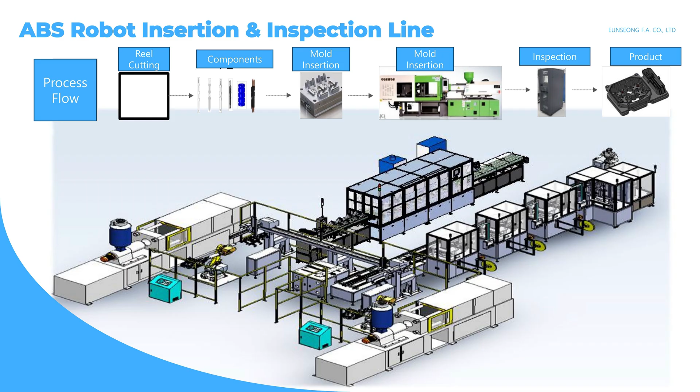ABS robot insertion and inspection line. This integrated line handles reel cutting, component preparation, mold insertion and molding, and inspection to produce finished products. Examining the line architecture, you'll see insertion and inspection stations featuring robotic arms and robotic grippers.

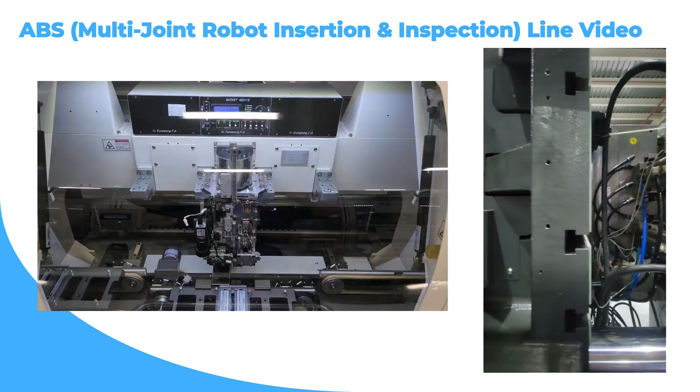EunSeong F.A.'s ABS robot insertion and inspection line represents proven reliability, innovation, and technical expertise.

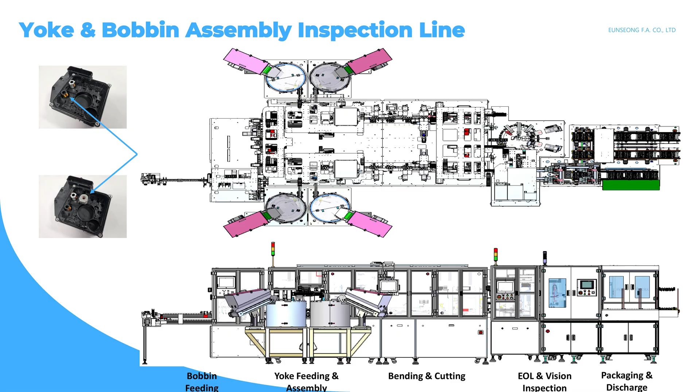Yoke bobbin assembly and inspection line. EunSeong F.A.'s yoke assembly and inspection line processes bobbin and yoke feeding, followed by assembly, bending, cutting, inspection, discharge, and packaging operations.

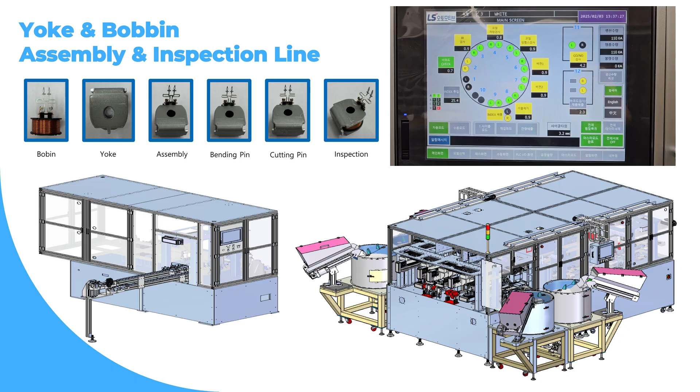The upper left image shows bobbins and yokes before processing, while the right displays finished products after assembly, bending, cutting, and inspection. FPCB crimping line.

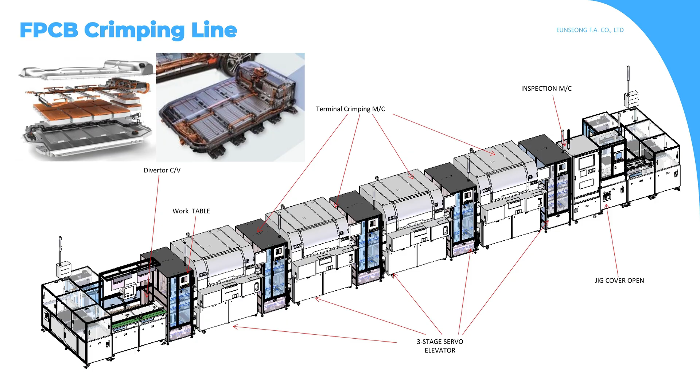The FPCB crimping line positions FPCBs on jigs, performs crimping operations, then conducts inspection and discharge. Dedicated pallets are required, and the system features automatic pallet movement throughout the line.

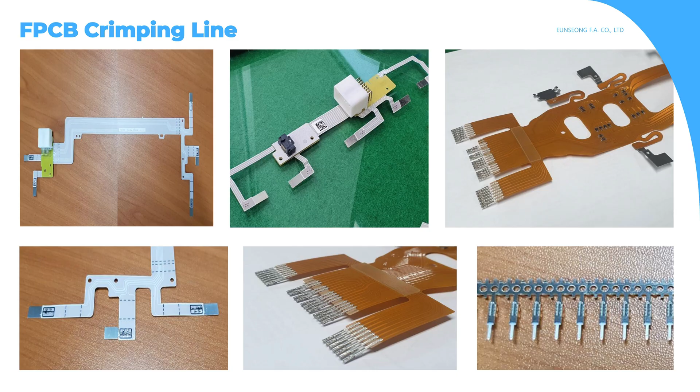FPC stands for Flexible Printed Circuit, a thin, easily deformed alternative to conventional rigid PCBs. This flexibility necessitates specialized terminals, jigs, and accessories.

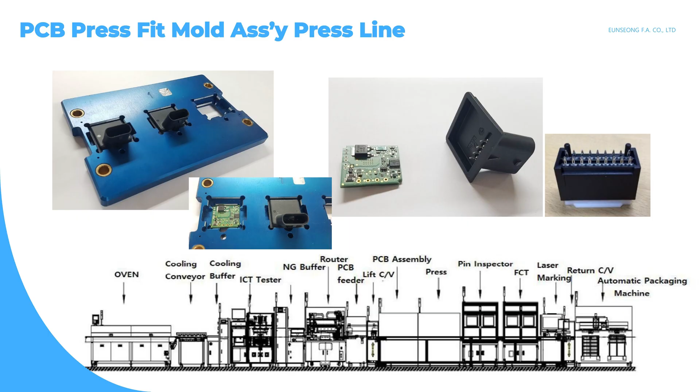PCB mold assembly line. Our PCB mold assembly line encompasses PCB preheating, curing, cooling, circuit testing, NG sorting, PCB cutting, mold pressing, pin inspection, functional testing, laser marking, and packaging capabilities.

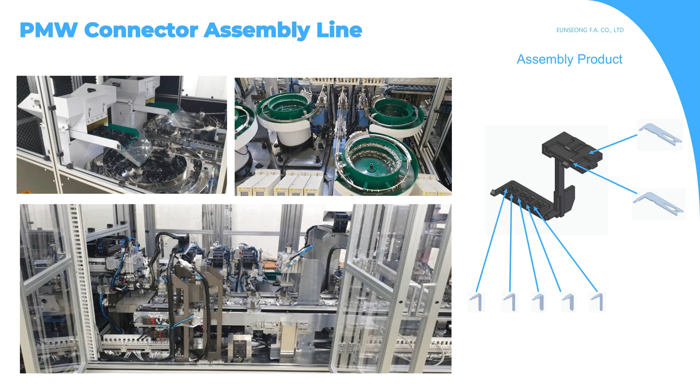The upper left image shows bowl feeders, component supply devices installed inside the equipment, while the lower image displays the actual production line. Mega fuse insertion line.

The mega fuse insertion line is engineered to support mega fuse inspection and assembly, bus bar assembly and barcode printing, bus bar clinching and inspection, force monitoring, and MES history management.

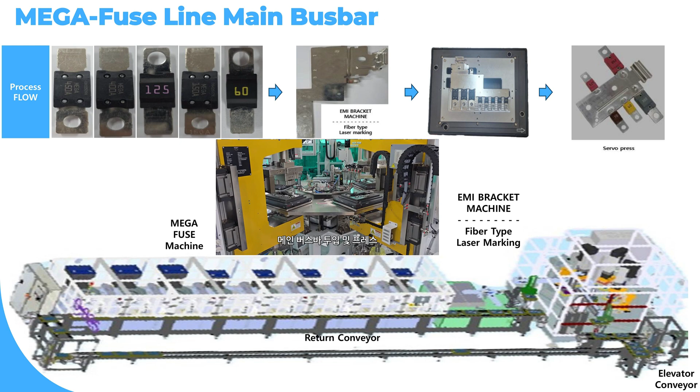Examining the mega fuse line main busbar process flow: fuses are loaded, main bus bars are fed, laser marking is applied, and pressing operations are executed.

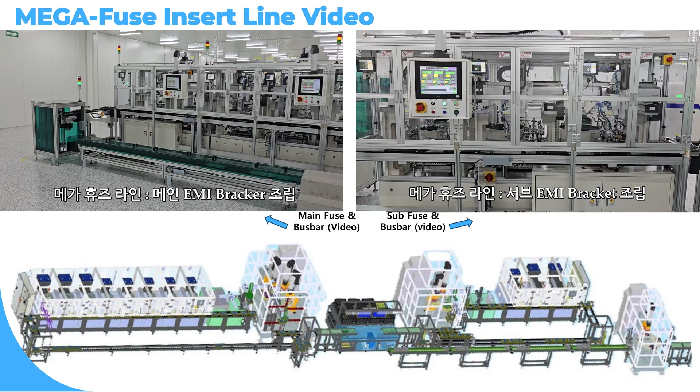This shows the megafuse line sub-bus bar process flow. Here's a complete view of the megafuse line with operational sequences for each station.

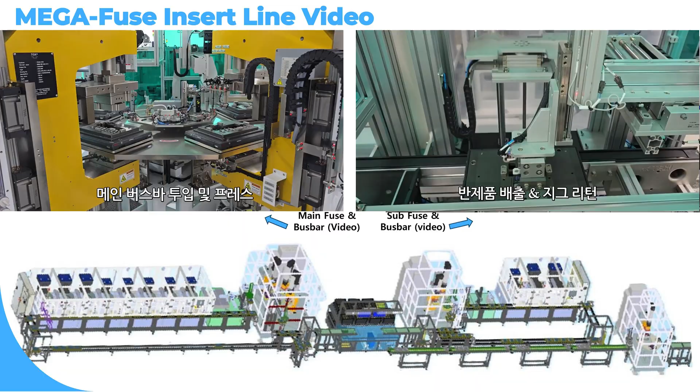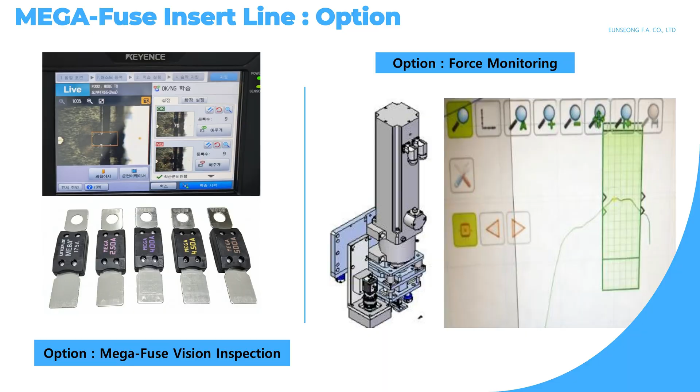Optional features include force monitoring and vision inspection systems.

Junction box line. Next, we present our automotive electrical junction box line. Below, you can see fuses after insertion.

Explore the intricate junction box manufacturing process, where each stage is meticulously automated. From vacuum loading to barcode insertion and precise resistor and terminal placement, every step is optimized.

Robotic soldering and vision inspection ensure unparalleled quality. After soldering, components undergo cooling before packaging, maintaining efficiency throughout.

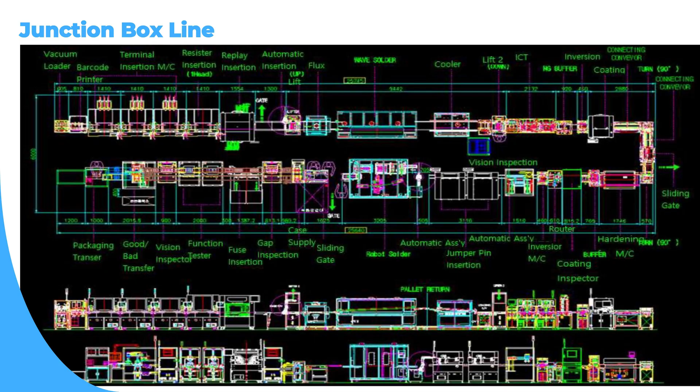This seamless integration of technology guarantees a robust production line, meeting business objectives with precision and reliability.

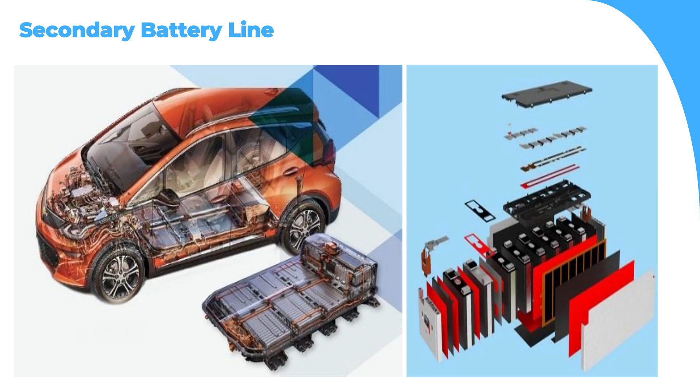The junction box production line comprises diverse equipment and processes. Vacuum systems, loaders, barcode printers, insertion and inspection equipment all work together through precision automation to guarantee product quality and productivity.

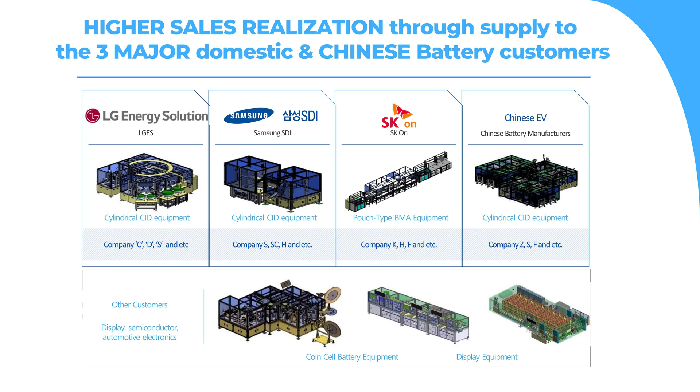Let me introduce our secondary battery line equipment. EunSeong maintains supply capabilities with Korea's 3 major manufacturers and leading Chinese battery producers. We'll now review our comprehensive secondary battery and automotive equipment line portfolio.